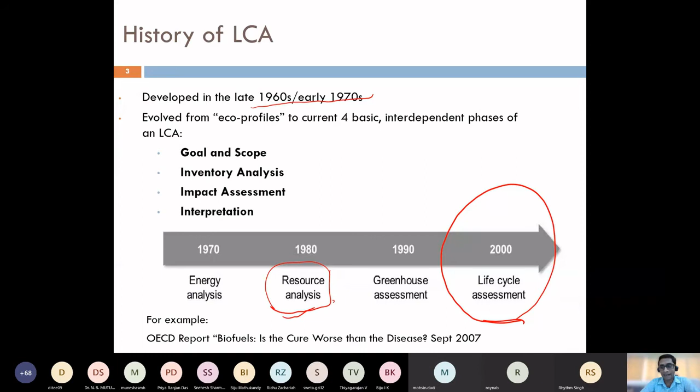So let's come to what are the commonly used LCA metrics. By metrics, I mean what are they trying to determine. As we started, it was energy.

Then you have global warming, or climate change, or CO2 emissions. Nowadays, people want the term climate change to be used much more often than global warming, because global warming has a sort of negative intonation associated with it. But when you say climate change, it's just a change - it's a neutral term, so you can't blame anyone. That's why it's just the language people have been using, and they often prefer climate change instead of global warming.

Then you have ozone depletion. We have ozone layers in the stratosphere, which prevents the coming of ultraviolet lights, and that causes problems like cancer. We also have the water footprint.

Specifically in a country like India, the water footprint makes much more sense. We just can't rely on processes which use a lot of water, because we don't have enough water to supply to our people. In a situation like this, if you're using a lot of water for the production of energy, it might not make sense.

Then human toxicity - certain things like nuclear power reactors would lead to nuclear radiations, which could lead to many toxic effects. How do we take care of those? That might not be applicable everywhere, but in the vicinity it does, and the effects could be somewhere more severe than CO2. So we need to take this into account.

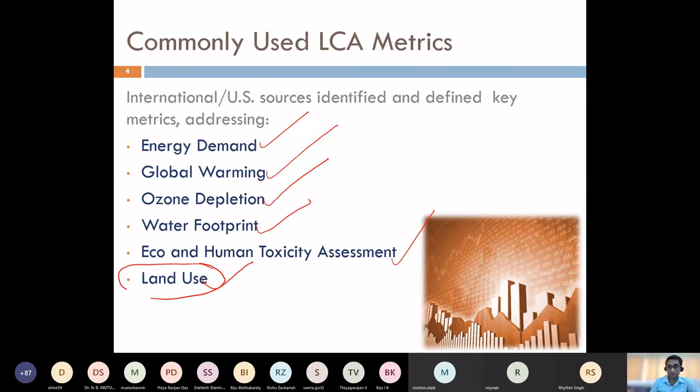Okay, so let's come to it. You might be asking, what is it in for me? So what can the LCA do?

Let's discuss this first. It would, in the first place, highlight the value chain efficiency. It will give you the chain of a product or a process, something similar to what you see in the figure on the right hand side. You can see there is an extraction, like the cranes here, then the construction phase, the building phase, then the recycling phase and the dumping phase. So you will become aware of the total supply chain of the process, where the raw material is coming from and where it is ending, and how much potential impacts it might be causing.

Again, it will give you an understanding of the product manufacture and delivery stages, something you might not have had initially. It will highlight the parts of the value chain that need improvement. It might happen that a small percentage of the process is causing the maximum amount of emissions, or the majority of emission, and instead of just neglecting that process, it might make sense to just change that part.

Another part, it would highlight the trade-offs. You can compare different systems that would essentially deliver the same service or the same product. You can also benchmark the systems, saying that this product has this much amount of carbon. It will also give you the carbon footprint, like the carbon footprint of this particular product, and it can also support your environmental claims.

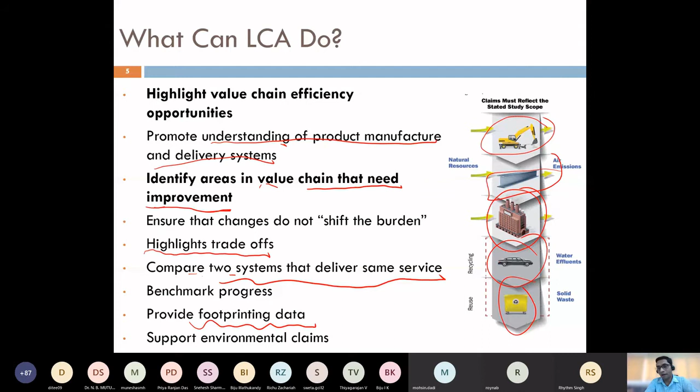Now suppose you say a paper bag is better than a polythene bag, or maybe a jute bag. How do you support that? It's LCA. You could have a study where you certify this, or it might happen in certain cases that a plastic bag is better than a paper bag. It just depends on the technologies and the actual system you are focusing upon. So this is what an LCA can do for you.

Now, what can't an LCA do? It wouldn't measure your performance. It wouldn't give you any efficiency. It wouldn't give you the bricks and mortar, or the breakup of the capital equipment or anything like that. You would include the capital expenditure if you want, but it wouldn't give you that breakup. That is something you would do in a techno-economic analysis, as you have studied in the earlier class.

It wouldn't give you any compliance with the environmental regulations, so that is something you would have to determine yourself - LCA won't do that for you. It wouldn't give you minor inputs, like every minor input or output that is there. It wouldn't be an analysis of your personnel needs. It wouldn't be any information about your employee direct impacts or risk assessment. So these are things that the LCA won't give you.

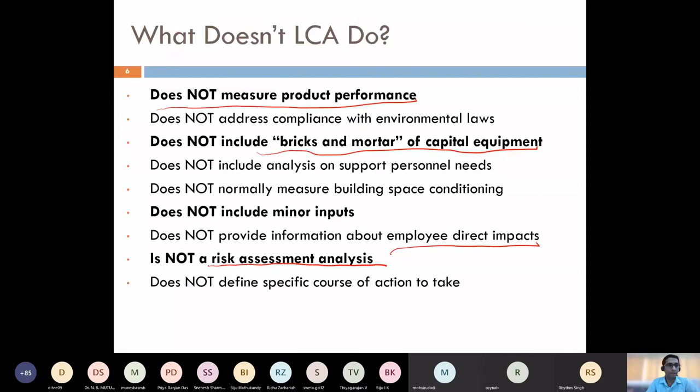It wouldn't give you any minor data. It is only going to give you the bigger picture, and assist you in doing a scenario analysis where you can construct different scenarios, as you saw in the case of the techno-economic analysis, and then compare them against the benchmark or the base case. So I believe this understanding is clear, what the LCA can do and what it can't do.

Now let's again have a discussion on the different parts of the LCA. It can be divided into two things: one is phases and the other is stages. By phases, I mean how the LCA is carried out, which is the algorithm for the LCA. By stages, I mean the product life cycle. So let's first see the stages.

There would mainly be an extraction phase where you extract the raw material. Then there would be a manufacture phase where the manufacturing takes place - it could be a plant or anything. Then it would be the use phase where you use the fuel or that product, and finally there would be a disposal phase. So these are the four stages which would be associated with any common product.

And of course, in between them, there would be transportation. The raw material needs to be transported to the manufacturing site, the manufactured product needs to be transferred to the user site, and then to the disposal site it needs to be transported as well. These are common stages that any product would have.

Now, once you have the flow sheet ready, you begin with the LCA, which has four different phases. The first one is goal and scope. You define the goal and scope of this study - this is what I'm trying to do, and this is what I'm not trying to do. You note it down specifically.

You do an inventory analysis of how much raw material is going in, how much manufactured product is going in, or how much fuel is going in the transportation sector. After use, what would be the leftover, what would be the mass and energy content of this. So you're preparing an inventory of all the mass and energy balance.

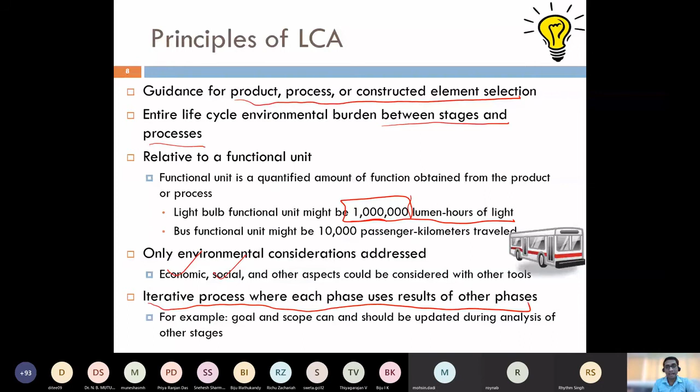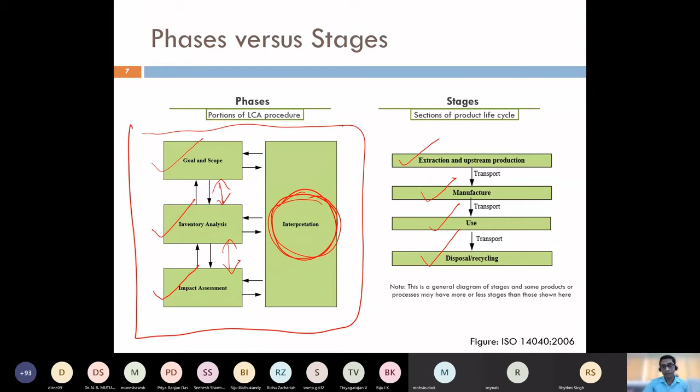Okay, so let's start with the initial parts. I'm reiterating again, these are the 4 phases of the LCA: goal and scope, inventory analysis, impact assessment, and interpretation. These are all based on the ISO standards. Let's understand all of these one by one.

So by goal, I make a statement of what I am trying to do. A good goal would state the intended use of the study, why I am doing this study, what is the audience - is it the normal public, the decision makers, a particular industry, the people of India, the US, or is it the people of Delhi or Chennai?

Because different LCAs could have different results. A study carried out in Chennai might not have the same interpretation or value for a person living in Delhi. And whether it is competitive, or should it be disclosed to the public? Or is it a confidential report that you need to supply to an industry?

Scope provides the methodological choices - what is the methodology that you have chosen? It should include the functional unit, like passengers into kilometers traveled, system boundary, how you're doing the allocation, the impact categories you're considering, and the product system. We are going to discuss these in detail. This is what goal and scope is all about.

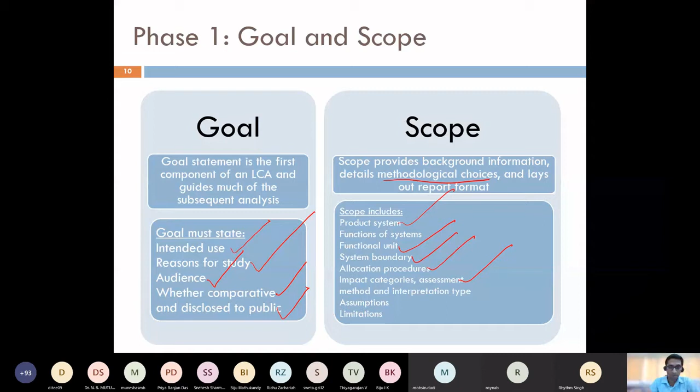So let me take you through an example. What would a goal look like? If I read one particular goal statement, it reads like this: the goal was to generate a quantitative environmental profile of the management system for all the used oil generated in California, which means it's concentrated to the state of California.

The results of the LCA, when combined with a closely integrated economic assessment performed by the economic contractor, will provide sufficiently broad information to be used by this particular industry, called Cal Recycle, to fulfill its duty pursuant to section so and so.

Why are you carrying out this study? Intended use: namely, provide suggestions to the legislature regarding possible policy changes to promote increasing collection and responsible management of used oil. This is the intended use - how this study could be used.

What is the audience? The intended audience of the study is this particular industry, or all industries involved and affected by the management of used oil generated in California, and the public at large. But the focus is oil generated in California and the public.

The results of the study are intended to be used in comparative assertions intended to be disclosed to the public, which means it could be disclosed to the public - it's not a confidential report, and people can use it to compare. So this is what a good goal statement would look like. It is expected that before you carry out an LCA, you write down a statement like this, which would be helpful in defining your methodology as well as your LCA as you move further.

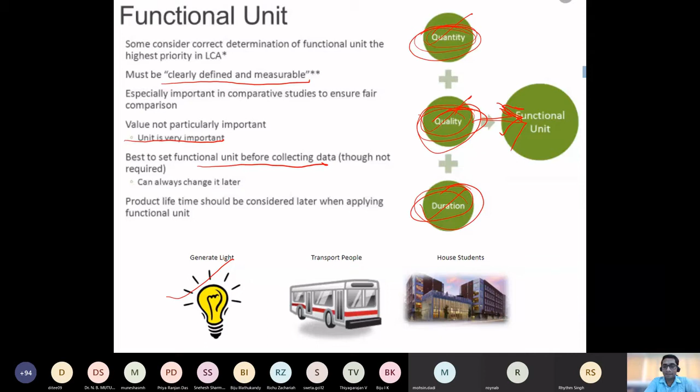So it must be clearly defined and measurable. You should be able to measure it and compare it - this is very important. It should have a unit, and it should be defined before you start collecting data, because unless you have it, it will become very difficult to collect data when you don't know what kind you need. You can always change it later, but it's always good to have that in mind before you begin. There could be examples like generate light, transport people, and student housing. We'll discuss that.

So let's compare the examples. 20 million lumen hours could be a function unit. So if my function unit is this, for an incandescent lamp, I would need around 22 incandescent lamps, which would have a wattage of 60 watts, 900 lumens per lamp, and 1,000 lifetime hours.

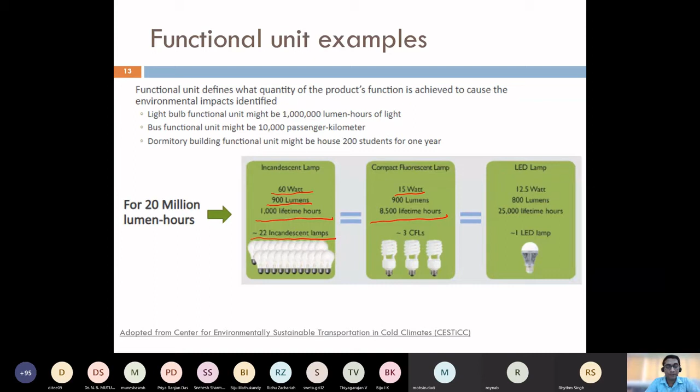If I compare this with a CFL, it would have a much bigger life and much smaller wattage. So if I had been comparing this on wattage only, or the lumens, or on hours, I wouldn't have gotten the right answer. But since my function unit comprises all the things in terms of million lumen hours, I can encompass both the wattage, the lumens, as well as the lifetime.

And the third example could be an LED lamp, which would have even smaller wattage, smaller lumens, but much bigger lifetime. So this kind of function unit has to be used, which would take into account the quality, the quantity, and the duration. And the function unit for a light bulb could be maybe 1 million lumen hours.

For a passenger bus it could be 10,000 passenger kilometers, or maybe for a dormitory building, it could be 200 students in 1 year. 200 gives you the quantity, students gives you the quality, and 1 year gives you the duration. So this is how a good function unit can be chosen.

Again, let's have another example. Suppose your goal is to compare the choice of bags. You have three choices: one is the plastic bag, the other is a paper bag, and the other is a cloth bag. Now there are three things.

One is the weight or volume and the amount, and the other thing is the times for which the bag can be used. Now, say for example the plastic bag, it might be able to have 6 pounds of weight or 1 foot cube of volume, and most of the time it would be used one time.

Compare that with a paper bag. It could have maybe 10 pounds of weight, 1 foot cube of volume. It's more sturdy, it can have much more weight, and it can be used 3 times.

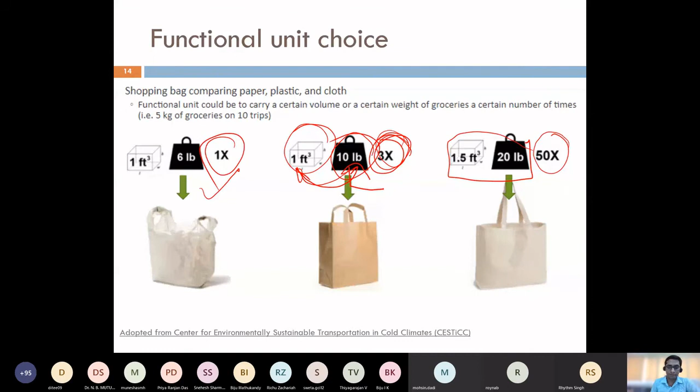So coming next, now system boundary. I believe you studied this concept in the techno-economic class as well. So a good system boundary would include the process stages that you want to compare. Now there are different types of system boundaries that you can take into account. Some of the examples are given.

It could be gate-to-gate, cradle-to-gate, cradle-to-gate with retailer, and cradle-to-grave. So what do these include? Say if I have the product stages where raw material extraction is there, product manufacturing, distribution, use, and disposal. Gate-to-gate means the raw materials arrive at the gate, and you're just concerned with the finished product at the factory gate, nothing else. You're getting the raw materials at the gate, you're doing some manufacturing with them, and you're getting the end products. So that is the LCA from gate to gate.

Then there is cradle to gate, which means you take care of the production of all the raw materials, whatever they may be — so from the cradle of all the raw materials till the gate of the finished product. Then there could be cradle to gate with the retailer, where I also take into account the distribution and the retail sector, which is basically the transportation of the manufactured product until the user or until the retail shops.

And there could be cradle to grave, which is the most encompassing one, which means I start with the production of all the raw materials till the disposal of all the raw materials. It's an end-to-end product.

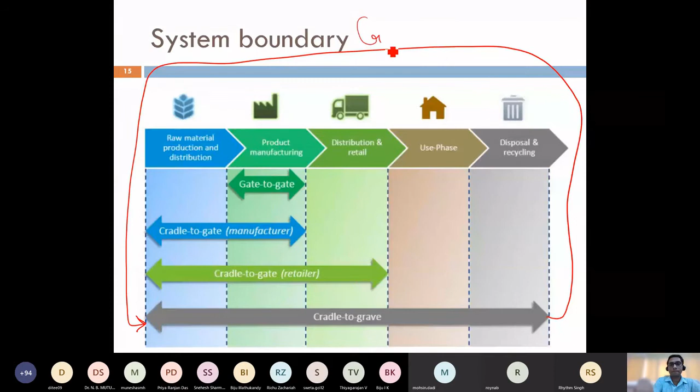The next could be cradle to cradle, which means you start with the grave and the products are recycled. And the methodology is called cradle to cradle, so you start with the end and end at the end. So the most encompassing are cradle to cradle and cradle to grave. These are the most reliable LCAs that you can rely on.

If the study is gate to gate or cradle to gate, you should see the results with a pinch of salt, because there might be emissions associated with the disposal of the product. So these are the different types of system boundaries you can take into account, and this is what they mean. I believe these are common terms you might be hearing in daily life as well, like gate to gate and cradle to gate, and these terms are becoming common nowadays.

And the system boundary again, what are the important factors I need to take into account? So if I'm assuming a cradle to, if a system is taking care of the cradle, these are the things I will take into account: material extraction. It could be extraction of crude, extraction of different materials.

It could be farming products, like how I'm producing different products, and different upstream processing, like refining of crude, which is an energy intensive process. So what would I use? I would use equipment. How are they constructed? The iron and steel going into equipment needs to be taken care of. The fuel use - what kind of fuel am I using in my supply chain?

Say if I am getting cheap oil produced in Venezuela, a country known to produce cheap oil, and if that oil is consuming a lot of energy in its transportation, it might not make carbon sense. Land use - how much land I'm using, water use, and the waste flows. Now these wastes could not be just the disposal phase, but the products you take, for example the mining operations as well as the drilling operations, would have waste associated with this as well. So we need to take this into account.

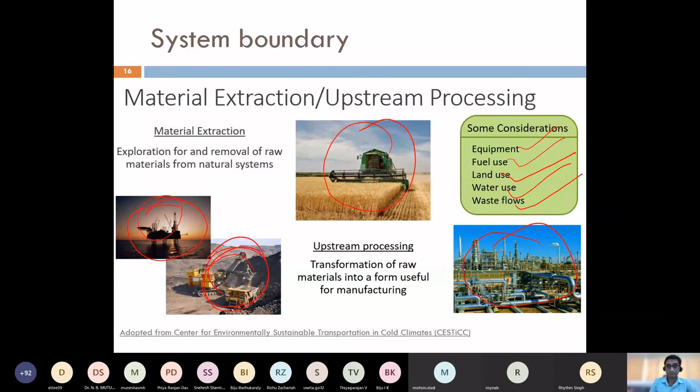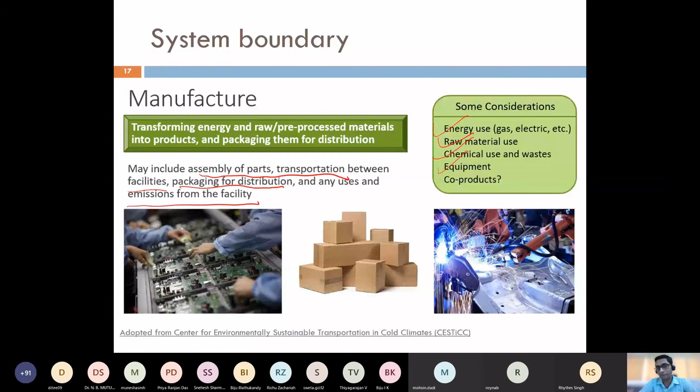Use phase - going beyond cradle to gate, there comes the use phase. How is the consumer using that product? Over what lifetime is the product being used? It would depend on, say I take the impacts of a typical lawn mower - it will depend on the frequency, how often I'm using it, the size of my lawn, the lifespan of the lawn mower, and the quality of oils I'm providing it with. So all these factors need to be taken into account.

We also need to take into account the uncertainty, since different people would use it in different ways. So we need to give a bigger picture to the final user, and bring in the element of uncertainty to see what would be the result on the total product if this particular process were to act in such a way. So how the product is being used, how it typically is used, what variations are possible, and what ways the product could be damaged or lead to failure in giving its intended use.

So these are some things we need to take into account while defining the system boundary. The last thing would be disposal, recycling, or reuse. Either we can dispose the product, or we can recycle it, which means we disband all the raw material in it and use it from point zero, or we reuse it for some other purposes. So we need to take note of what we are doing, and all this would have different ways.

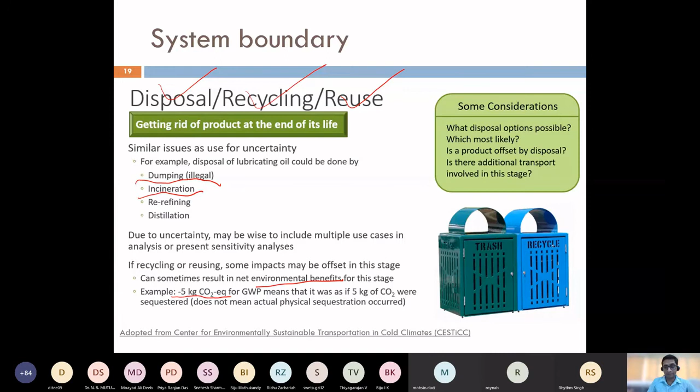So these are the things that you need to keep into account as far as this system boundary is concerned. Then, okay, so there's one last thing which I forward, it's the transportation. You need transportation for extraction, for processing, to the customer, to the disposal facility, and you can't avoid it.

Now transportation is basically dependent on fossil fuels. You do it either by trucks. If you do it by trucks, the fuel is diesel or petrol. In most cases, it is diesel. And this diesel would have its own emissions.

Not only diesel, these trucks would have some lubricating oils as well. Again, these are coming from fossil fuels. They end up as emissions. These trucks are made up of maybe steel or iron, and the extraction of these elements would again have energy consumed, and this energy would be coming from fossil fuels. So you have emissions associated with them.

So there are a lot of emissions associated, and that's why you need to define the system boundary really carefully. This is what I'm taking into account, and this is what I am not, so that the comparison becomes even more fruitful.

You just can't compare apples to oranges. You would only compare the LCA studies which have a similar system boundary and a similar functional unit. And that is why the concept of system boundary and the functional unit is very important.

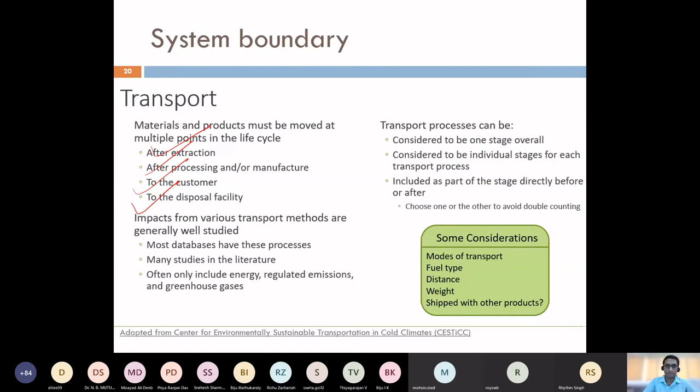Okay, now coming to phase 2 and phase 3 of the study. But before that, I would like to ask if anyone has any questions till this part of the class.

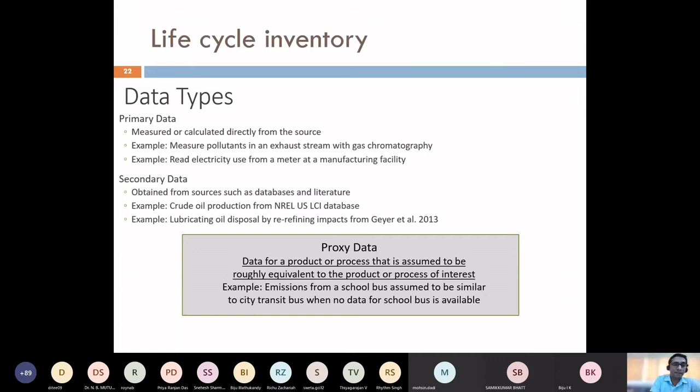Now, first, life cycle inventory. There could be two types of data. One is the primary data, which would essentially mean it is measured and calculated directly from the source. You go directly to the plant or the process and make measurements using maybe a GC or an emission meter or something like those.

You measure the pollutants in the exhaust stream, maybe using gas chromatography. You read the electricity use, and the electricity footprint is something you can get from the power plant. If you have a coal-based power plant, you can do some basic calculation and come up with the basic minimum emissions. A typical coal-based power plant would have emissions between 1,000 grams of CO2 per kilowatt hour of electricity produced. So this is the minimum, and you can make assumptions like this.

And the other could be secondary data. There are different databases and literature available that you consult, called secondary sources. A few examples could be NREL, the National Renewable Energy Laboratories of the US, which has a huge database. For India, there are certain providers like GABI, or even Simapro has a good amount of Indian data, so you can select that.

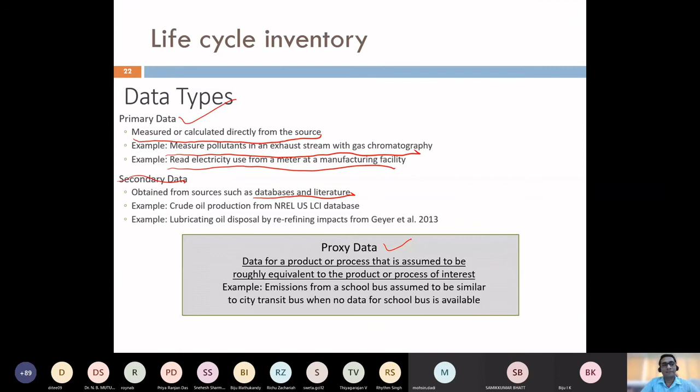Also you can have some proxy data, in terms like I am producing RDF, meaning refuse derived fuel. If I have a waste treatment facility producing RDF, and you don't want to go to the facility to see the energy content, but you know that 700 grams of RDF could easily replace 1 kg of coal, you would take the emissions associated with 1 kg of coal and multiply that with 0.7, and come up with the emission reduction or emission potential of those RDFs. This is an example of proxy data, where you use proxy means to estimate the data.

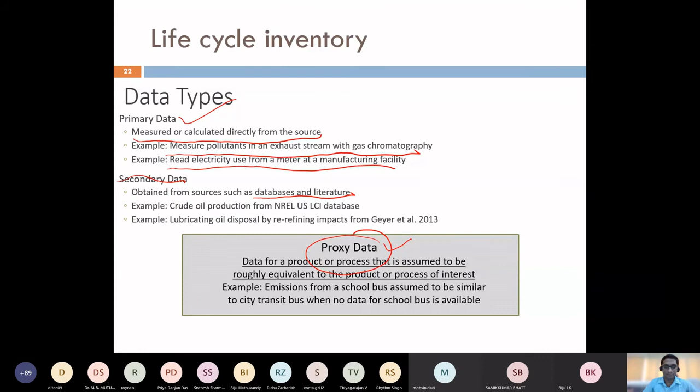Again, this is a similar thing. The data sources could be primary data, which is direct measurement, or secondary data, meaning LCI databases or journal articles. This GREET database is basically for transportation fuels. It's a very extensive database made by Argonne, Argonne National Laboratory, and it gives you a lot of data on different fuels. So if anyone is doing a study on different fuels, electric vehicles, biofuels, or crude, this is the place to go. And the final type is proxy data or estimated data.

Impact assessment: you have all the data, you know which things are going in and which things are going out. The next thing is impact assessment—how much impact those emissions are going to have. So with impact assessment, let me walk you through an example.

Say you have SO2 emissions. Now SO2 emissions would possibly lead to acid rain, and this acid rain could lead to acidified lakes, meaning the pH of the lake has reduced. This would again cause the death of marine life, mainly fishes, and finally it could lead to a loss of biodiversity. So this is one particular emission traced through different impact stages.

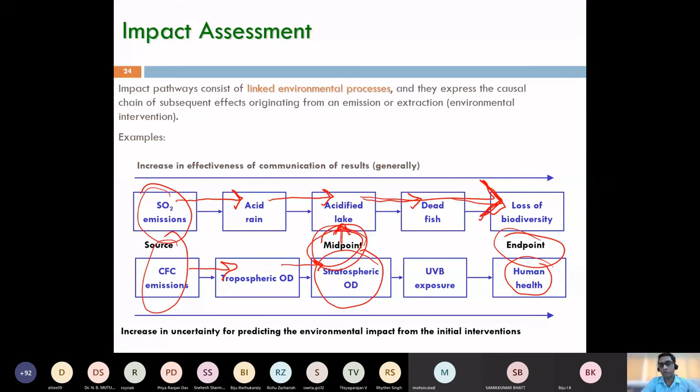If I calculate the midpoint impacts, they have much more scientific evidence attached to them. I can easily quantify that this much amount of SO2 is going to lead to this much acidification of the lake, or this much CFC emissions will lead to so much ozone depletion - much more quantifiable, much more scientific. But when leading this to the endpoint, a lot of assumptions come into being which might not be correct everywhere, but it makes much more sense to a common person or the policymaker.

If I go to the policymakers saying the ozone layer has decreased by 10%, he might not be that worried. But if I say the life expectancy has been reduced by 10 years, he is going to be really afraid, because 10 years is huge - almost like 10% of your life has reduced. But the relationship between midpoint and endpoint depends on a lot of factors, and it might have a lot of uncertainty at times.

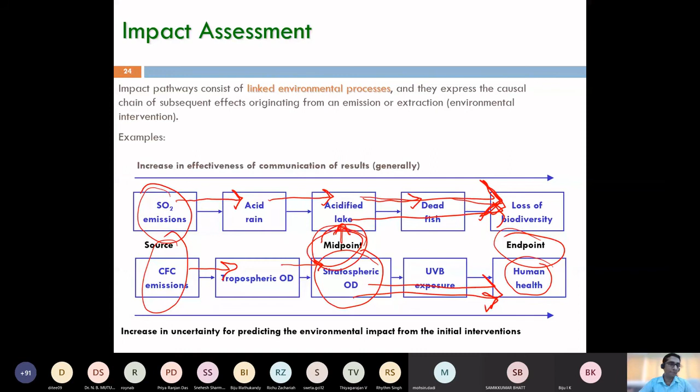So these are the two types of impact assessments carried out: midpoint and endpoint. Both have their advantages and disadvantages.

Coming to another similar example: CFCs released to the atmosphere are basically chlorofluorocarbons and halons, and this leads to midpoint indicators, which could have different damages - cancer was one of them. It could also lead to crop damage, marine life damage, or cataracts. If I quantify and present a result in terms of this, it makes much more sense. But this relation between the midpoint and the endpoint could have much uncertainty in it. The research as it is carried out makes these things better, but there is still a lot of scope, and it would again depend a lot on the history as well as the geography.

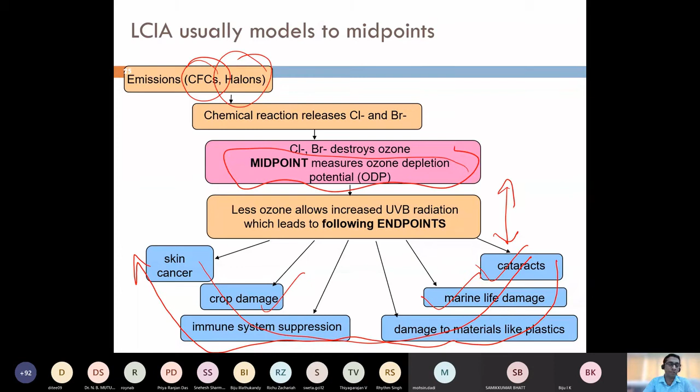So there are different kinds of life cycle impact assessment categories, and this is one of those. It's called ReCiPe methodology, which came up in 2008. This is thought to be the most extensive one, which has 18 midpoint indicators and 3 endpoint indicators coming out to be a single one.

So these are the endpoints which would be coming from different emissions, which could be carbon dioxide, volatile organic compounds, phosphorus, sulfur, NOx, CFC, or different fertilizers like DDT. It could cause different factors, and as you can see, different arrows are leading to different things.

Say for example, this CO2 would go to climate change, and this climate change would cause change in infrared forcing, which is how much CO2 gets trapped, and it would damage human health. Take for example another thing.

Which is this eutrophication. It would lead to algae growth, and this algae would damage the ecosystem. So different factors could lead to either one or more of these impacts.

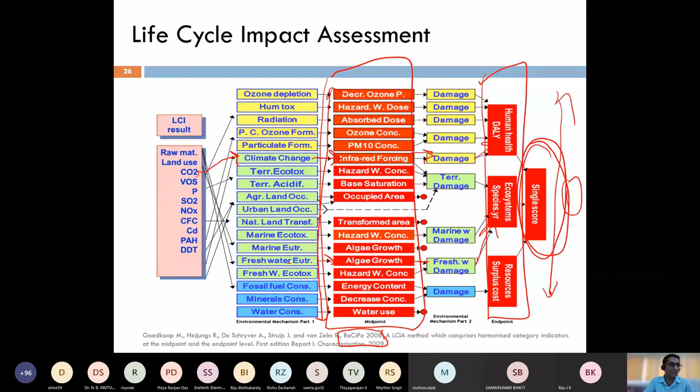Okay, so again, how is this classification done? Now there are different emissions that could lead to a single impact, so it's very important to understand the difference. Let's take one impact category, which is climate change. Climate change is the impact category. What is the result? It's the emission of the greenhouse gases.

Now there will be different characterization models. For climate change, the most common one is the IPCC, the Intergovernmental Panel on Climate Change. They have come up with a model. What is the indicator? It's the infrared radiative forcing, and it has a time factor which is a 100 year time horizon. Some people do it on a 20 year time horizon and a 500 year time horizon as well, but the most common is 100 years.

So with that, we have certain values given in the table below, which say that all emissions which lead to climate change could be calculated in terms of CO2 equivalent. If I'm emitting 1 kg of CO2, it will be equivalent to 1 kg of CO2. If I'm emitting methane, it would be equivalent to 21 kgs of CO2. 1 kg of CFC11 would be equivalent to 4,000 kgs of CO2. Similarly, 1 kg of sulfur hexafluoride could be equivalent to 23,900 equivalent of CO2. So all these chemicals, if released to the atmosphere, are going to cause climate change.

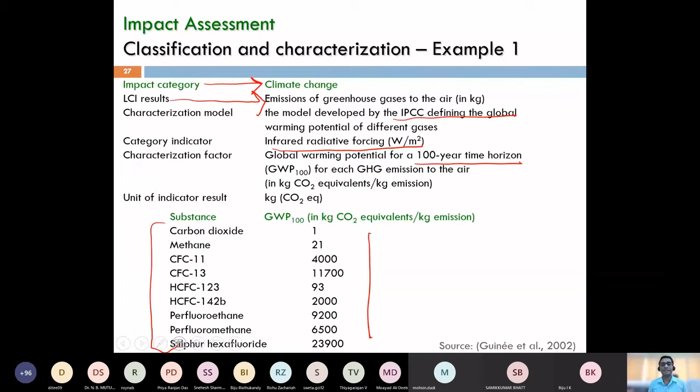And to quantify them, I am normalizing them to a single unit, which is equivalent to CO2. So what I need to do is multiply the emissions by these factors, and this gives me the CO2 equivalent for that particular impact assessment category, which is climate change. I have just one example here, so let's try to understand this with the help of an example.

Say I have this process which is releasing all these gases. It is releasing 20 kgs of CO2 in total, 2 kgs of methane, 5 g of CFC11, 2 kgs of NO2, and 1 kg of sulfur dioxide. Now I know there are 2 gases in it, CO2 and CFC11, or CO2 and methane, that are going to cause climate change, which is global warming.

Now there is again one gas, CFC11, which would also cause climate change and stratospheric ozone depletion, because CFCs cause climate change as well as ozone depletion. A chemical like NO2 would be responsible for both photochemical oxidant formation and acidification. A chemical like SO2 would only cause acidification. So we have these 5 chemicals that are being released throughout the supply chain of a chemical, and what we are doing is trying to quantify what its effect is going to be like.

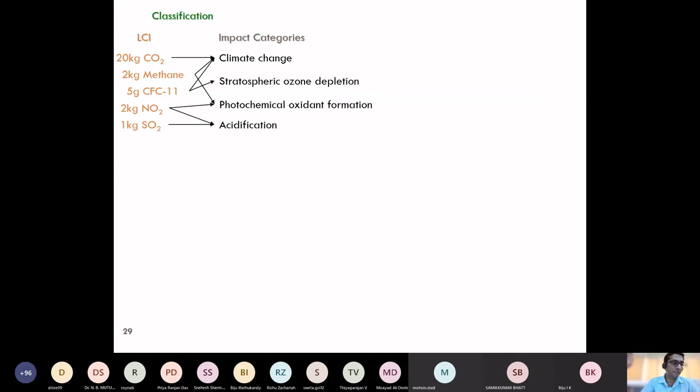So climate change goes to global warming potential. This would go to ozone depletion potential. Photochemical oxidant formation would go to photochemical ozone creation. And finally, acidification would go to acidification potential.

So I make a table like this. I note down all the chemicals being released, which is CO2, methane, CFCs, NO2, and SO2, and the amounts in kgs that are known to me. Here I note down the different characterization factors, which is, if I go for GWP 100, meaning global warming potential over a lifespan of 100 years, the unit is CO2 equivalent.

So the characterization factor for CO2 would be 1. For methane, it would be 21, so every kg of methane released would have the impact equivalent to 21 kgs of CO2 being released. Then CFC 11, which would have an impact equivalent to 4,000 times.

Coming to ozone depletion potential, there's only one chemical doing it, and that is CFC 11, and that is the characterization factor. So I just have one here.

Coming to photochemical oxidant formation, it's in terms of kg of ethylene equivalent. I don't have ethylene being released here, but I have methane and NO2, which would lead to this particular impact, and the characterization factors are 0.006 and 0.028.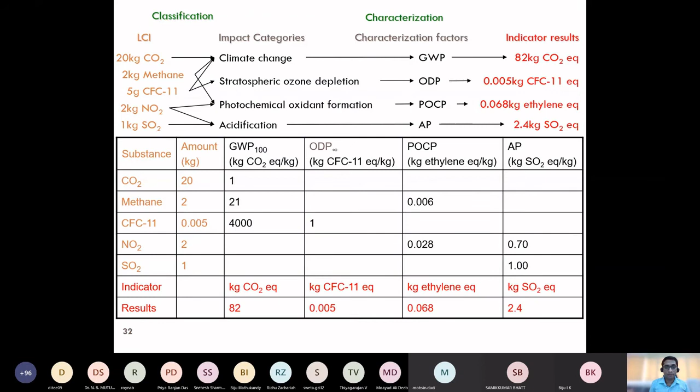That is equal to another 20 kgs of CO2 equivalent. I add them up, and the final CO2 equivalent that I get is 82 kgs equivalent. Note that the actual CO2 is only 20. I am also normalizing methane and the effect of CFC 11, which would have the same effect as CO2, and the final CO2 equivalent I'm getting is 82 kgs of CO2 equivalent. I could do a similar calculation for others as well, and this gives me the total results: 82 kg of CO2 equivalent for GWP 100.

For the case of ozone depletion potential, I'm just multiplying 0.005 to 1, so it's 0.005, very less for ethylene, photo oxidation chemical potential, and a similar multiplication by the factors can also give me the acidification potential. The point to note is that a release of 0.005 kgs of a chemical, which is CFC 11, 4 orders of magnitude smaller than CO2, could have a similar impact. Both are causing an impact of 20 kgs of CO2 equivalent. So it is both the quality and the quantity of the emission that needs to be taken into account.

So let me take a break here and let you know if you have any questions with respect to this calculation.

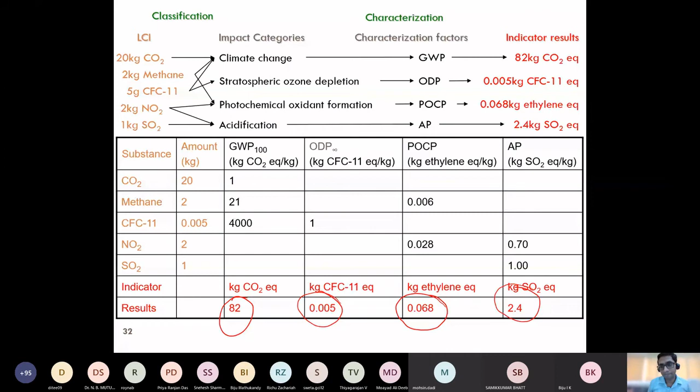Okay, so if there are no questions, let us proceed.

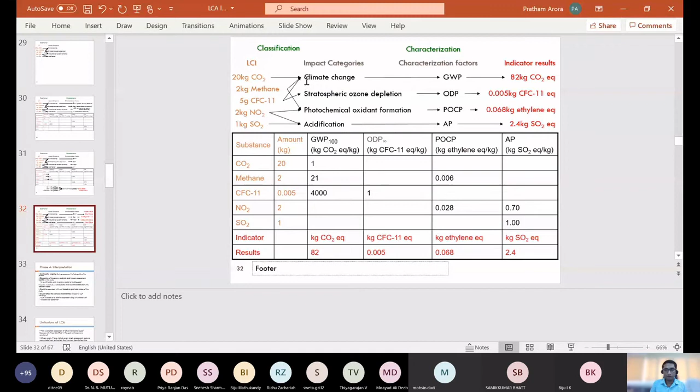This is how you would quantify the different emissions and bring them under a single characterization value. The fourth thing is interpretation, how you are going to interpret the results. It's a continuously ongoing process, meaning the assessment is carried out continuously, and it's iterative, as we saw in the earlier phase. You see the results and then come up with conclusions and recommendations. In case you find any problem, you go and redefine your goal and scope. You include more inventories that are needed, you modify the data if needed, and you also include a lot of uncertainties.

So now let's come to what are the limitations of an LCA. Again, this is something we have touched on in the earlier slides as well. It's not a complete assessment of all the environmental issues. It includes a lot of them, but they are not all. There might be something it can't capture, as there is no foolproof system.

It tries to take in as much emissions into account as possible, but it's not a complete assessment. It cannot include every single process and capture every single input and output. That's just not humanly possible. You try to include as much as possible, but you just can't include every single process and every single input and output.

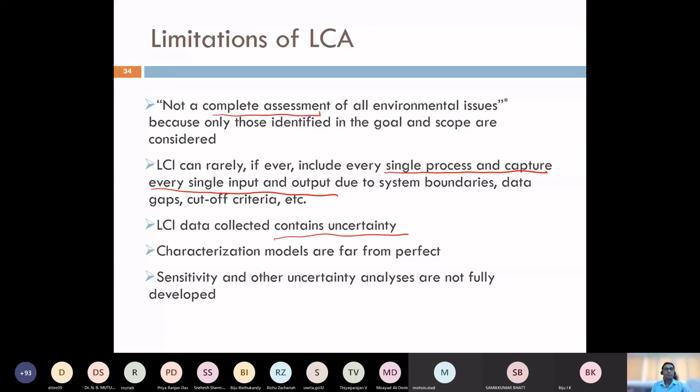So with that, let us come to LCA of energy systems. What are some things we need to take into account when doing LCA of energy systems? That is what the course is all about. I've taken an energy system based upon biomass, but it would be applicable to any energy system in common. So here are three columns, or three colors: what's mostly covered by an LCA, less covered by LCA, and the least covered by LCA.

Most LCAs in literature will start from biomass transportation, conversion, biomass distribution, and bioenergy use. They take into account the direct resources and direct emissions. So this is what a normal study would include: biomass transport, biomass conversion, biomass distribution, and biomass energy.

A few better studies would also go into the production of biomass feedstocks, meaning they take into account the amount of fertilizers and pesticides used, and what field mechanization was required. In the case of solar, how the panels have been produced, where the silica was imported from, how the diodes are formed.

Very few studies will compare the impact on land use change, which is also called the indirect impact. Suppose a land already had a forest, or was used for cultivating a food crop. Now I'm producing biofuels on that, or I've established a solar field or wind field there producing electricity. That land, which was earlier used for food or for sequestering carbon as forest, is now being used differently, or that activity might be set up elsewhere. So it might cause problems with food demand, dietary trends, energy demand, biomass production elsewhere, trade policy, or energy supply and cost. All these are called indirect resources.

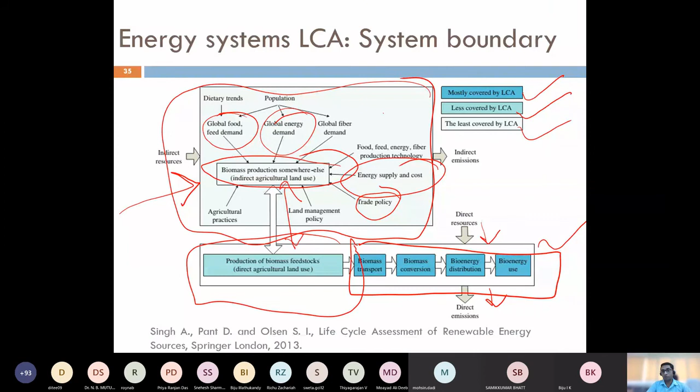Let me give you a brief about two kinds of LCAs you're bound to come across. One is attributional LCA and the other is consequential LCA. By attributional LCA, I mean I have this system and I just want to see what the results are. Say I have a solar panel and I want to see the emissions per kilowatt hour of electricity produced. That would be an attributional LCA.

But if I want to see what change it is creating—in the sense that if I'm using solar energy, I would render some coal-based power plants running at a lower capacity, meaning lower efficiency, meaning they would emit much more emissions than they normally would for the production of electricity—that is where I am entering into consequential LCA, where I am much more worried about the consequences of introducing a product into the market than the product itself.

The first kind of LCA would only have a system boundary which just has the solar panels into account. We are not concerned about how the electricity was being produced and will be produced in the future. But a consequential LCA would take into account how the present intervention is going to cause a change in electricity production as well. It's called status quo versus change oriented.

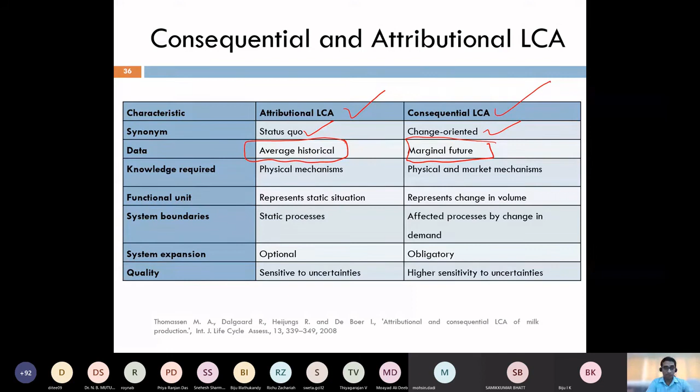So this is just for your knowledge, these are the two kinds of LCAs that are available. Most of the time you will come across attributional LCAs, but in case you come across consequential LCAs, you should know what the difference is. It's not always correct to compare these two kinds. You need to compare attributional LCA with attributional LCA, and consequential LCA with consequential LCA. The reason being the data they have chosen is different and the assumptions they are choosing are also different.

Again, we come back to the land use change, which becomes a lot more important in the case of systems when you are dealing with bioenergy or any energy system, because the land transformation is going to change the cultivation of crops, and the removal of biomass residues from the soil, which are a source of sequestrated CO2, and this might release more CO2, nitrous oxide, and methane into the atmosphere. So it's a very complex thing which you might want to study if you are going into this field of LCA of energy systems, and land use is a major part of it.

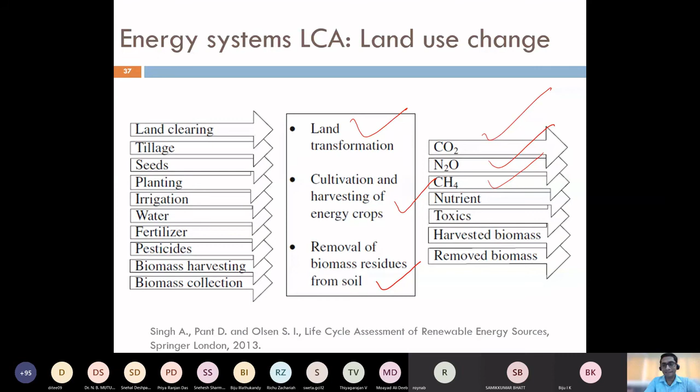Some people neglect this, but it is very important: water use. As I gave an example earlier, is biofuel the solution or is it worse than the original problem? That might be a reason, because certain biofuels like soybean biodiesel or corn ethanol consume enormous amounts of water. Compare that with petroleum extraction or oil refining, which use very little. So can we afford to put so much water into the production of fuels like biofuels? It's questionable. They might be nature friendly in terms of CO2 emissions, but look at the amount of water they might be using.

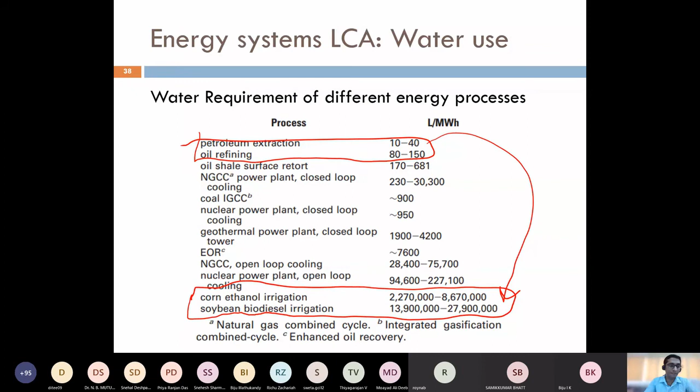Does that make sense? Again, this is not for us to answer. Our aim is to provide the data, and it's up to the policymakers to make an informed choice. This might also be true for certain solar technologies like solar concentrators, which are assumed to consume a lot of water as well. Is it justified? Does it make sense? This is the type of data that LCA would give us.

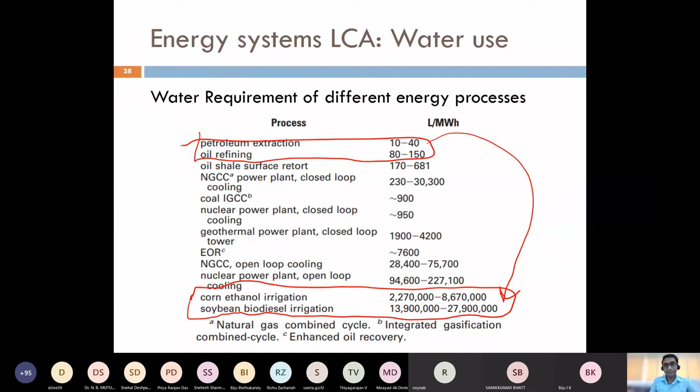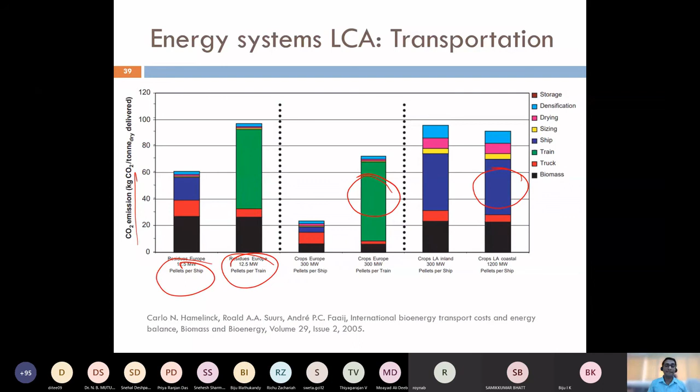Transportation could be very different for different parts. Here I've compared three different parts, like shipping pellets through ships and trains in different parts, and it gives different CO2 emissions, which could vary differently for different crops and different places. There will be certain areas where trains are highly used, and certain areas where ships would be used, so we need to take care of how the biomass or energy is being transported from one end to another, because that in itself would also have emissions associated with it.

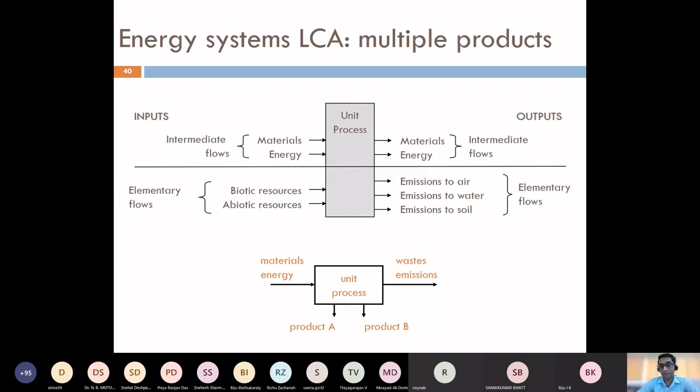Now coming to multiple products: it would happen that a single process ends up giving you multiple products. As in the case of many renewable energy sources, the products could be twofold - one single stream going in, and two kinds of products coming out. Take for example the biodiesel production process: it will give you biodiesel as well as glycerin. So in case you have two products, how do you bifurcate the emissions between both of them? You just can't allocate all the emissions to one product. The emissions from the whole system need to be divided into both products. How do you do that? Let's take an example for this.

Suppose you have a unit process which is emitting 1 kg of CO2, and it has 2 products: 20 kg of product A and 80 kg of product B.

If I do an allocation on the basis of mass, I would divide this unit process into two processes. In one, I'm producing 20 kg of product A, and the emission associated is 20% of the total emission, which is 0.2 kg. In the other, I allocate 80 kg of the product and 80% of the emissions. So I'm doing it on a mass basis.

Total, I'm producing 100 kg of both products, out of which 20 kg is product A and 80 kg is product B. So I allocate the emissions accordingly: 20%, which is 0.2 kg, goes to product A, and 0.8 kg goes to product B. So this is one kind of allocation.

The other could be based upon the economic value of these products. Say 20 kg of product A is produced but has a value of $900, while the 80 kg of product B has an economic value of just $100 — it might be produced in huge quantity, but the economic value is very low. The other allocation could be: I allocate 90% of the emissions to product A and 10% to product B, as can be seen here.

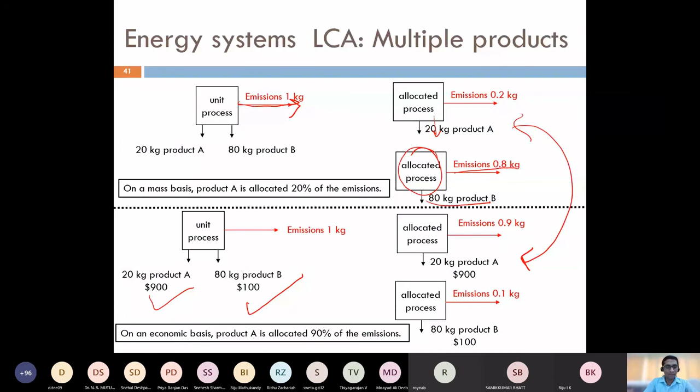Let me know if anyone has any doubts till this point, because after this we'll take maybe an example. Okay, great. So let's proceed further.

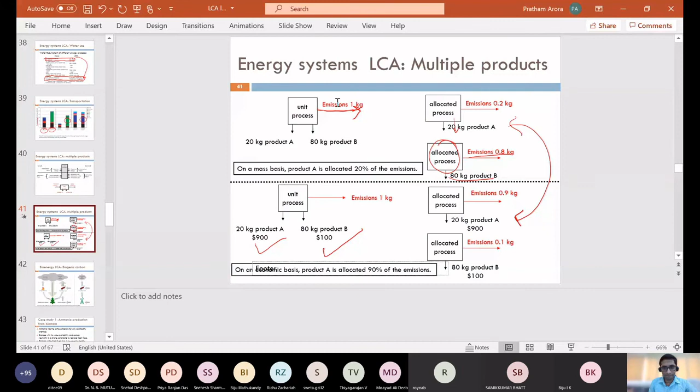One more aspect with respect to energy systems, which might be taken more into account with respect to bioenergy systems, is biogenic carbon. Biomass can be a renewable, sustainable source of energy only till we are growing biomass in place of the biomass that we have already cut or utilized.

Whereas in case of biomass, I use it in a bioenergy system. I release some carbon into the atmosphere, and I extract that carbon back using growth of more biomass. But in this case, when using this bioenergy system, there would be some amount of energy coming from fossil fuels. So it's not carbon neutral, or carbon intensity zero — it has some intensity, because this fossil fuel and geologic carbon that's going into the atmosphere is not sequestered back. Only the biogenic carbon gets taken in.

So when dealing with fuels such as biofuels, which have a conversion or retake of CO2 back into the growth phase, we need to be very careful distinguishing biogenic carbon from geological carbon. The geologic carbon would cause a CO2 emission, whereas biogenic carbon wouldn't. Biogenic carbon is very similar to burning of biomass — you just burn the biomass, and the only thing emitted is CO2, which gets taken back when you grow new biomass. So this is the biogenic cycle.

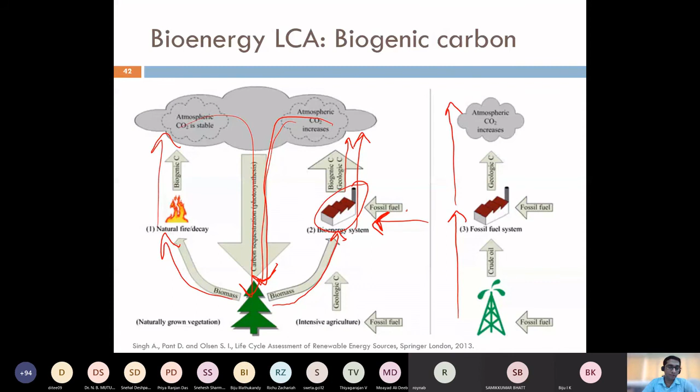In the future, when we are a lot more dependent on renewable energy, we can say that our energy systems are maybe carbon neutral or carbon negative. But as of now, no matter which technology you choose, be it solar, wind, thermal, or hydro, all have emissions. It might be less or large for someone, but all of them have some emissions associated with them.

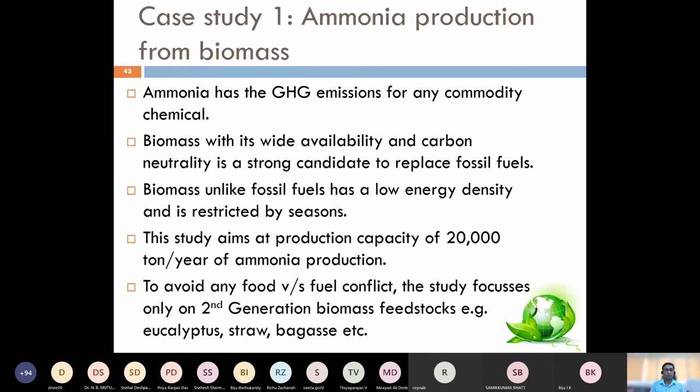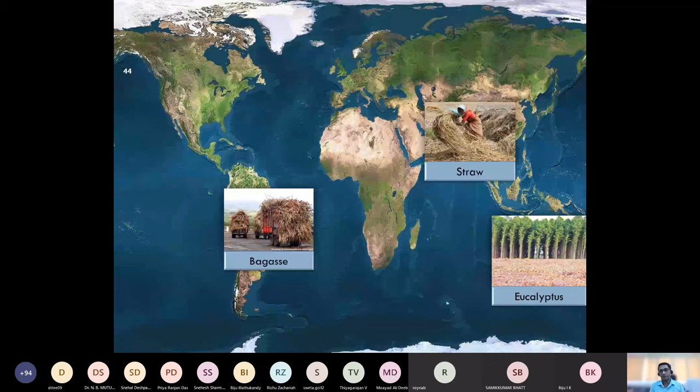Now let's take the same example for ammonia production from biomass. I would skip this slide because we have already explained the process - it's the production of ammonia from biomass through the gasification process. We have chosen 3 different case studies: bagasse in Brazil, straw in India, and eucalyptus in Australia. This is what the flow sheet looked like. We have the biomass production phase, the gasification, the gas conditioning, and finally the ammonia production.

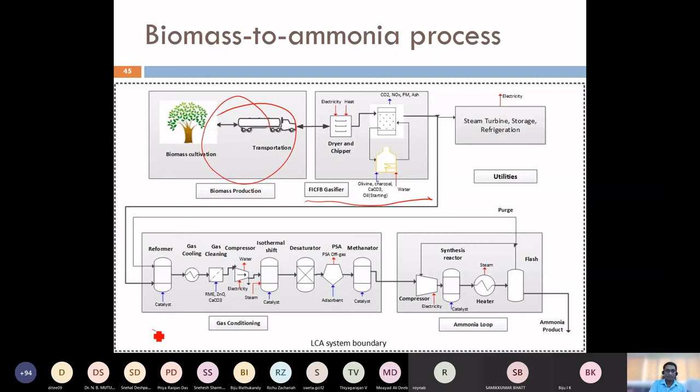This is what the LCA would give me - which kind of emissions are coming from which phase of the product. Like say in the growth of biomass, the emissions are negative, which means I am taking in CO2 from the atmosphere, and that is what is happening. I transport the biomass, there's some diesel consumed, I release it into air. I have the gasification process, I release again some CO2 into the atmosphere.

I have the methane reforming, which would consume some fuel. I have some emissions. For compressing, I need electricity, which would come from the grid, so I have some emissions associated with electricity. The PSA would mainly release all the CO2 and give hydrogen here, so all the CO2 is now going out. So the LCA would show the sources and sinks - in this case, I've shown you what are the major sources and sinks of CO2 in this particular process.

Now let's try to compare the 3 flow sheets again. Say global warming potential - it could be very different for the 3 different feedstocks in 3 different countries. Like take the case of India - the electricity for grid, this is the global warming potential in kg of CO2 equivalent per kg of ammonia produced. We have the 3 different cases on the x-axis and the straw case for India.

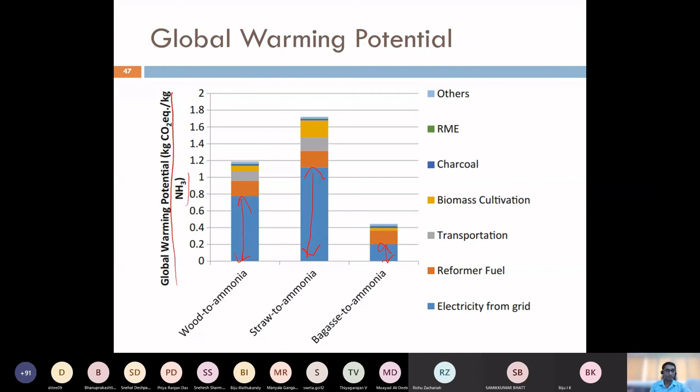For the Indian case, we have dirty electricity, which is based on coal. So even if the electricity in kilowatt hours is the same in all 3 cases, the emissions associated are very high in India, second for Australia, and very least for Brazil. The reason is in India, the electricity production process is very inefficient and based on coal. In Australia, again it's based on coal, but the processes are much more efficient. In Brazil, where the bagasse is being used, the electricity is much more hydro-based, so that's why emissions are very less. So the same consumption could have different emissions in different parts of the world and lead to different results, even if the flow sheet is the same.

Take the example of ozone depletion potential for the same production of ammonia - here it is kgs of CFC equivalent per kg of ammonia produced. If I take the case of India, the maximum emissions are coming from transportation as well as electricity. In case of Australia, there are hardly any emissions from electricity because the processes are very efficient and even transportation is efficient. Now take the example of Brazil - it has a lot of emissions associated with reformer fuel, which is absent in Australia. It is somewhat similar in India and Australia. So again, the same potential could come from very different sources for the same process.

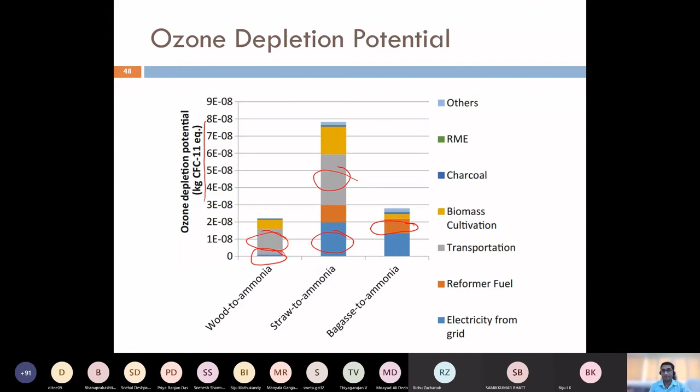With the increased nutrient content, a lot of algae grows in these water bodies. You would have seen in the ponds in the villages, it's always covered with green slime or algae. These algae block the way of the sun and sunlight from reaching inside the water bodies. It would kill a lot of the marine aquatic system, and that's what is called eutrophication.

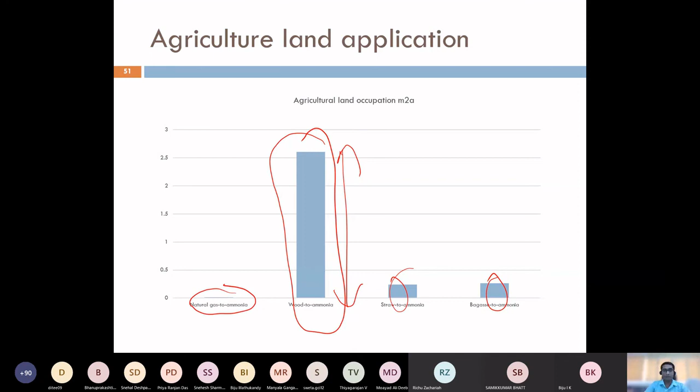If I'm considering the case of straw or bagasse, these are side products, not the main products. Whereas wood would be specifically grown for the production of ammonia, and that's why it would have a huge land application compared to the natural gas to ammonia process, which is a conventional process.

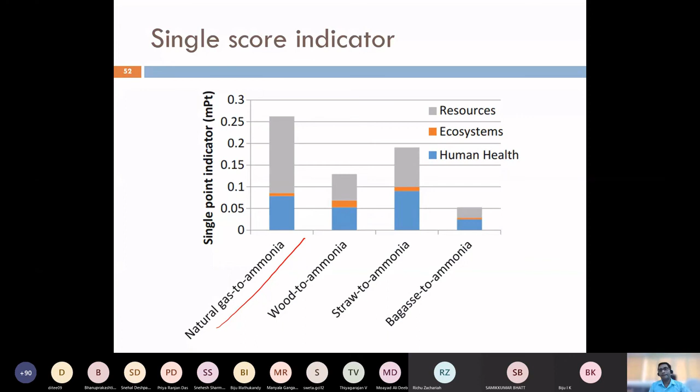So these are some of the results that the LCA system would give us. Again, I can normalize all of them to a single unit. If I normalize them, of course we are better in terms of the natural gas to ammonia process. But if we look at them individually, there will be certain impact factors where we are already higher than a fossil fuel based process.

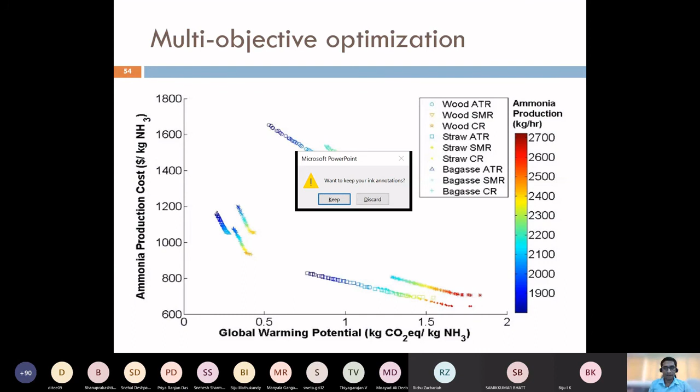And then we would go for a multi-objective optimization like this. So with that, I had another example to discuss, but let me leave that. I would like to give you some experience with the type of software that is being used for LCA.

So let me share my screen, and in a couple of minutes I'll take you through SimaPro, which is one such software.

This should be it. I believe everyone is able to see my screen. So this is one particular type of software that might be used for calculating the life cycle assessment of different processes and products, specifically renewable energy sources. We have an interface which looks similar to this. Sorry to interrupt you, we are not able to see the screen, sir, right now.

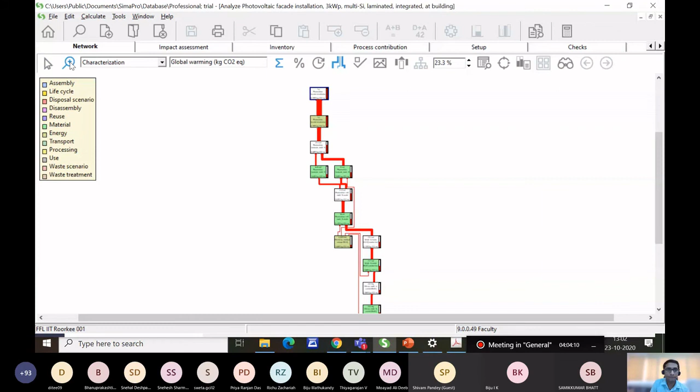So software like this creates a whole supply chain. Say if I was to produce one piece of this 3 kilowatt peak solar panel, this is the amount of CO2 emissions, which is 6.19 into 10 to the power 3 kgs of CO2 equivalent. These are the types of CO2 equivalents that I would be emitting into the atmosphere if I were to produce this. It also gives me a whole supply chain showing where the emissions are coming from.

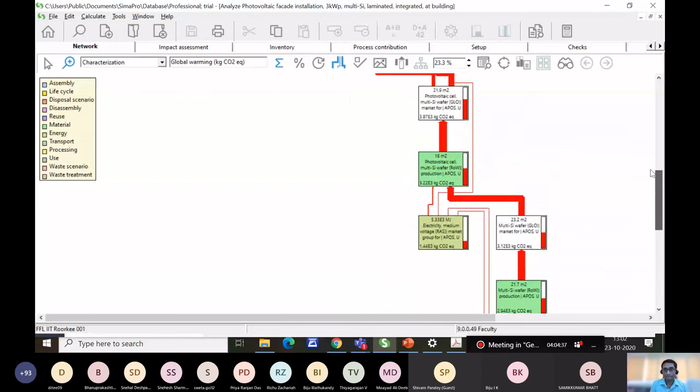I can do not only global warming, but also different characterization factors. It could be like, say I chose ozone formation. So it can do that as well.

Which result are you showing, sir? This 6.19 into 10 to the power 3 CO2 emission is for 3 kilowatt PV production. So all CO2, all emissions are included, from the raw mining from silicon to the whole conversion. That's the beauty of this software, or of LCA.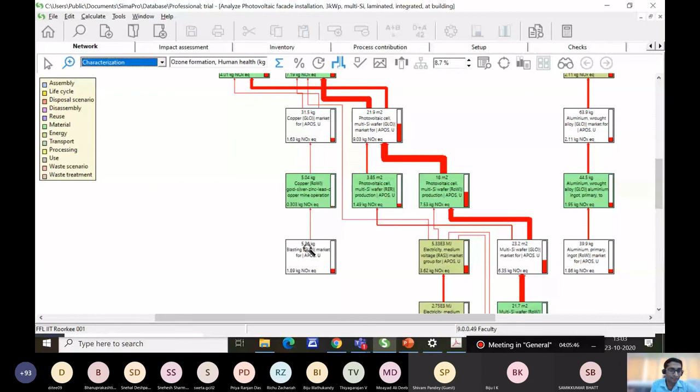So if I expand this, it will show, for example, the NOx emission that has come here. If I increase or decrease the percentage, it will become much more complex. You can see the aluminum getting extracted here, the electricity going in, the silicon extraction, the silicon casting being taken into account, and also the blast furnace for copper being taken into account. So I believe that answers your question.

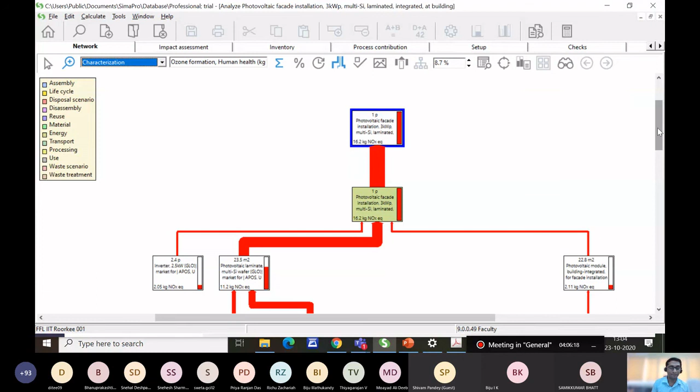Similar answers can be derived for different sources of energy, renewable or non-renewable, and you can make your own life cycle assessments. This is just to give you a visual experience of what the things look like. With this, maybe I will stop here, and I would be happy to answer any other questions you might have, or in case you have questions regarding the software, we can also have a discussion on that.